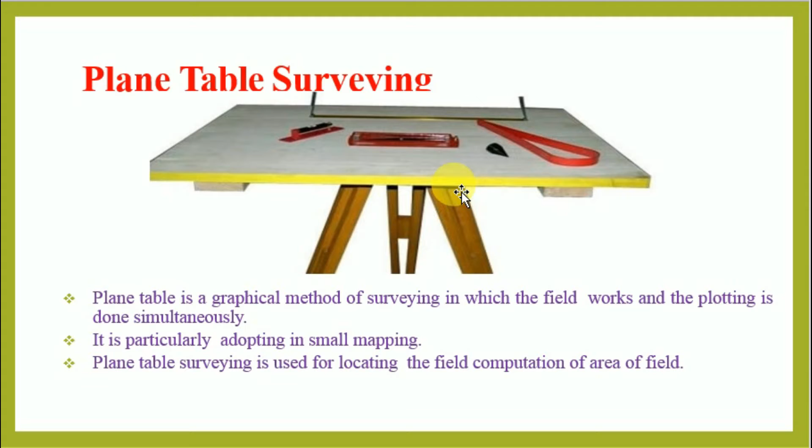First of all, what is plane table? Plane table is a method of surveying in which the field work and plotting work is done simultaneously. Here the figure shows a table connected to our tripod. We have some accessories; we will be discussing them one by one. This plane table is generally used for small mapping and computing the area of a field.

There are some accessories shown. First one is magnetic compass to get the direction. There is a plumbing fork to connect the plumb bob. There is a drawing board with tripod. Here is a tape to get the measurement. Here is the alidade.

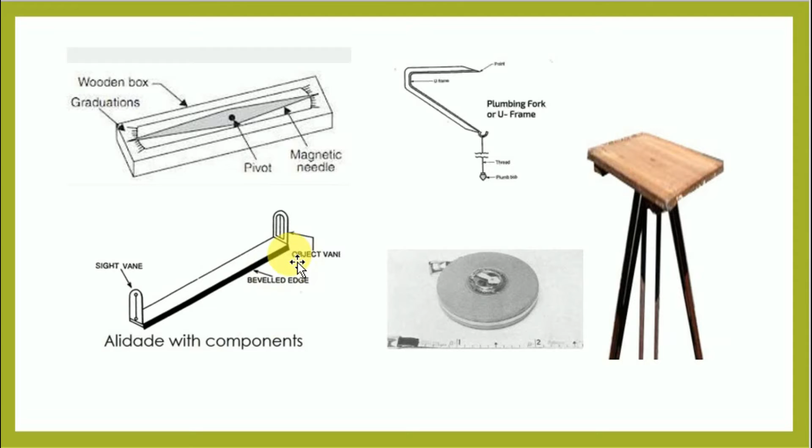There are two sight vanes. There is object vane and sight vane for the viewing of station objects, and marking with this straight edge, which is also known as ruler. So these accessories we are discussing one by one.

Drawing board of size 30 to 40 centimeter up to 60 to 75 centimeter is generally used, with well seasoned wood such as teak. Alidade consists of two vertical sights we have already shown. Alidade consists of a straight edge, which is used for drawing purpose. This is made up of brass or teak wood.

There is a tripod to support the drawing board, spirit level for leveling the table, plumbing fork to connect the plumb bob for centering purpose, and drawing sheet. Good quality paper should be used for drawing sheets.

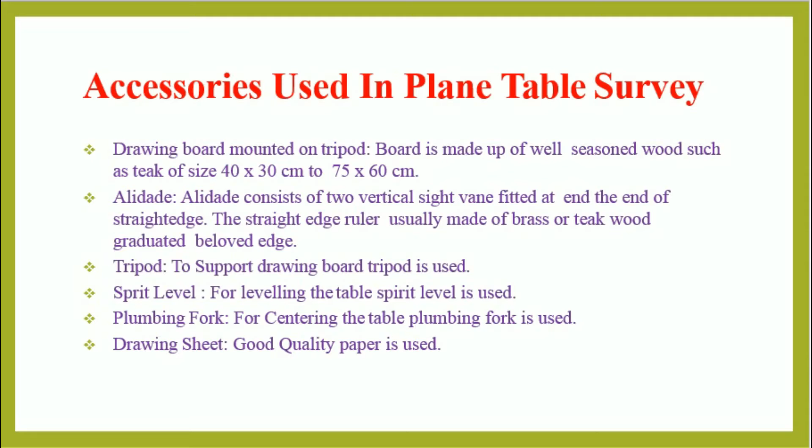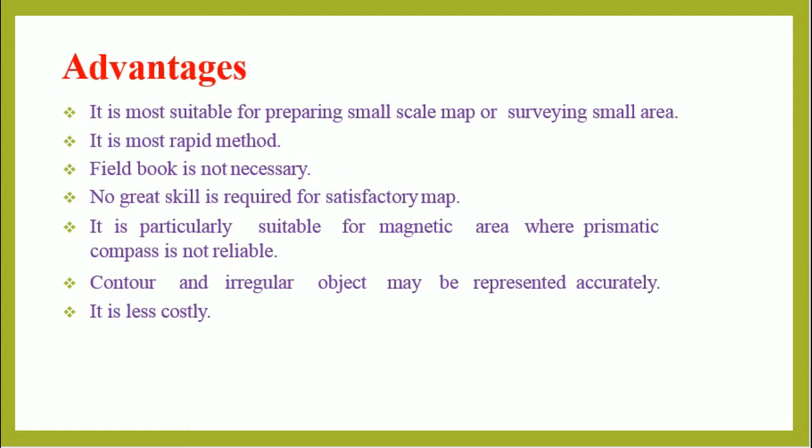Now we are discussing the advantages. It is used for preparing small scale mapping of small areas. It is a more rapid method. Field book is not necessary. No great skill is required. Suitable for magnetic areas. Contours and irregular objects may be represented accurately. It is less costly. Here are some advantages.

There are disadvantages also. Plane table is essentially a tropical instrument. If the surface is irregular, it is difficult to survey. It is not suitable to work in wet climate. Several accessories are required, so these accessories may be lost while surveying. It is not suitable for accurate works. Plane table surveying is not accurate work.

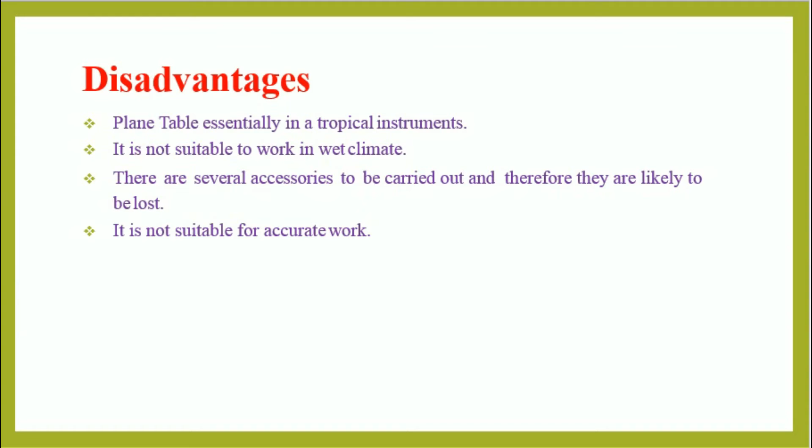Now, how is the principle of plane table survey applied? It is a drawing board. First of all, we will be connecting this drawing board on the tripod, and we will be getting the direction first and mark the direction. Then we will be doing the sighting work. Here shows the alidade which sights OA. Here is the object A for sighting. We are using the sight vane and object vane for this sighting and marking the line of sight on the paper.

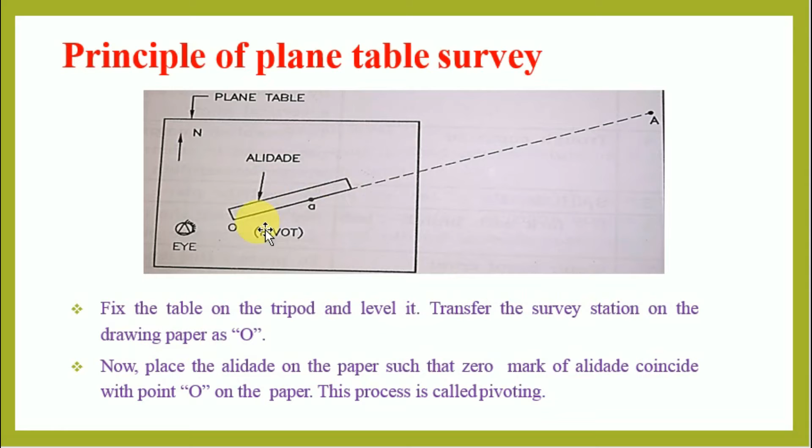Setting up of plane table. For setting up of plane table, there are three main requirements for any survey using plane table. Centering is done to keep the plane table on the station using plumb bob. Leveling is done by means of a leveling screw and socket arrangement with a level tube. Orientation is the process of keeping the table in the position which is occupied at the first station. So these are the 3 steps for setting up the plane table: centering, leveling and orientation.

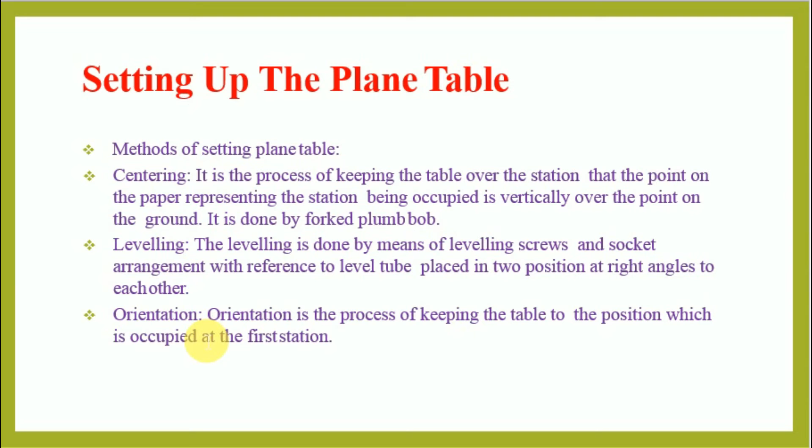I'll be talking about the methods of plane table. There are 4 methods of plane table survey. First one is method of radiation. Method of radiation means first we will be keeping the drawing board on the tripod on the station which is central to our area. Then we will be using centering, leveling and orientation processes. Thereafter we will be getting the direction using compass, and then we will be using line of sight using our alidade.

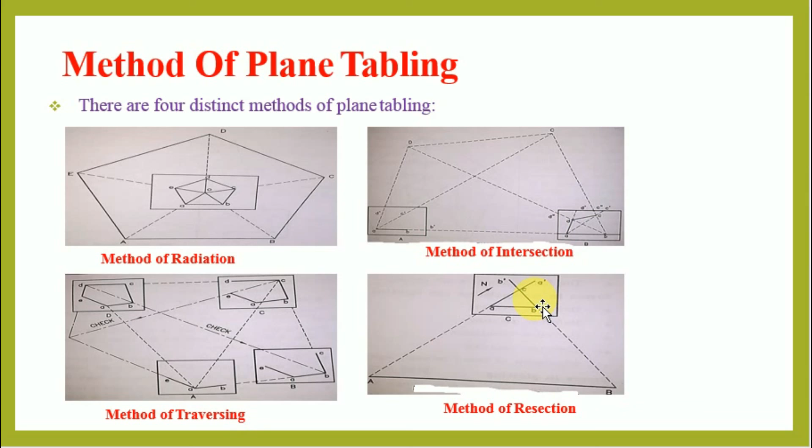Method of resection. In method of resection, using one station we are measuring the other 2 stations. We are focusing on A and line is drawn as OA, and focusing on B, we are measuring the line OB, and we are drawing a line AB. Here shows the line OB in the drawing paper. So this method of resection is done to get the actual station of our site. So here are the 4 methods of plane table: method of radiation, method of intersection, method of traversing, and method of resection.